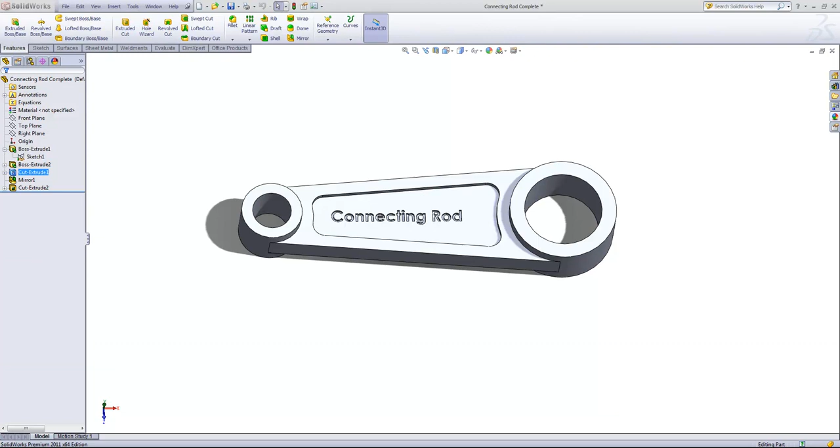In this video, we'll create multiple extrusions from the same sketch, and this allows you to create your entire profile. So the entire profile here that we see, except for the connecting rod sketch, is produced in a single sketch. If I take a look at that sketch, we can see we have different profiles, and we're going to use them for separate extrusions.

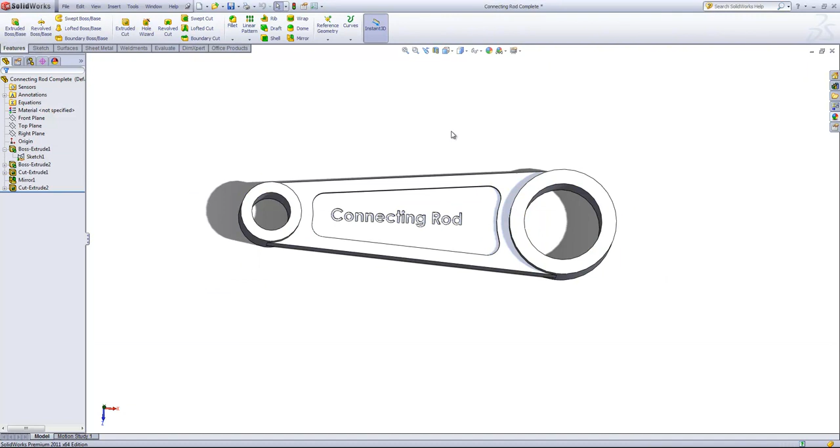So the first thing we'll do is create a new part, and then I'll go ahead and draw up a sketch on the top plane. We'll start by drawing in a center line horizontal to the origin.

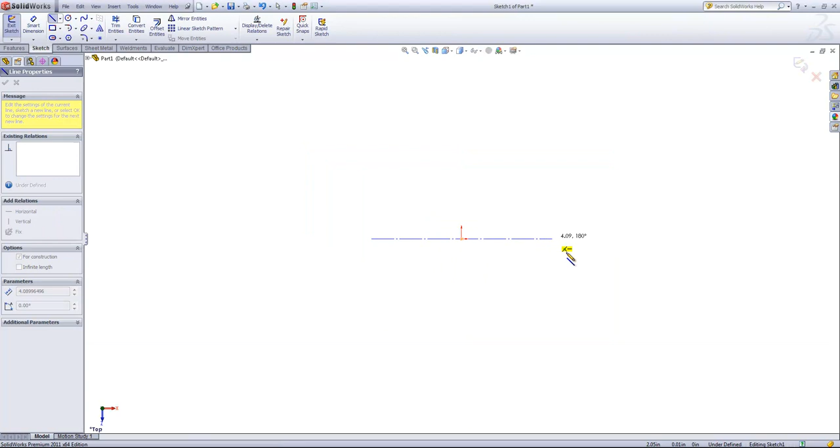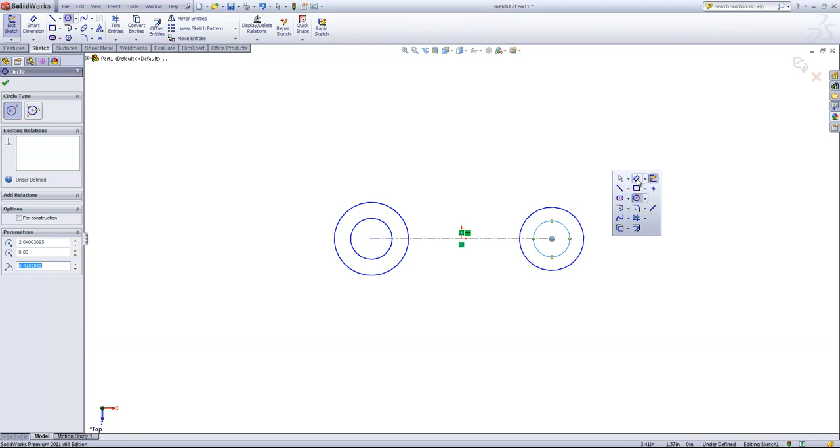Then I'm going to make the center line and the origin have a midpoint relation. And then I'm going to place several circles on both sides of the line, and then we'll go ahead and give this dimensions.

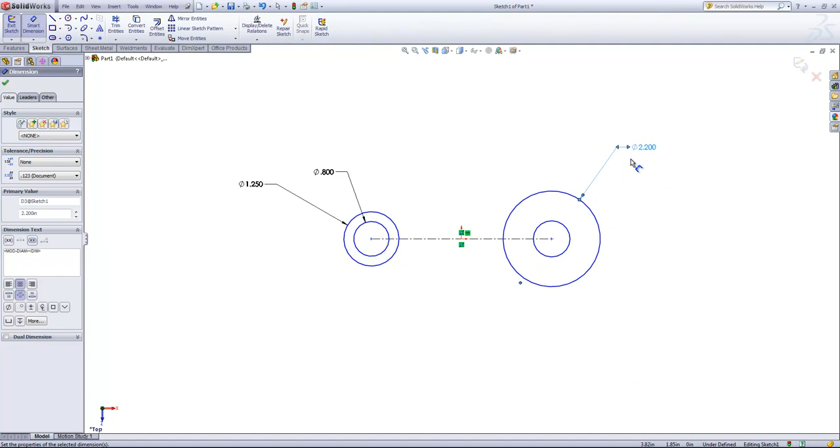So the first circle will be 1¼ and this inside circle will have a diameter of 0.8 inches. On the other side, this will have a diameter of 2.2 inches, and the inside circle will have a diameter of 1.6. From there, I'm going to give this center line a length of 6 inches.

Then we're going to draw in a line from one circle to the other, and we want these two to be tangent. Because they're a different size, the only point we don't want to click here is one of these quarter points, because that'll make it coincident to that quarter of the circle.

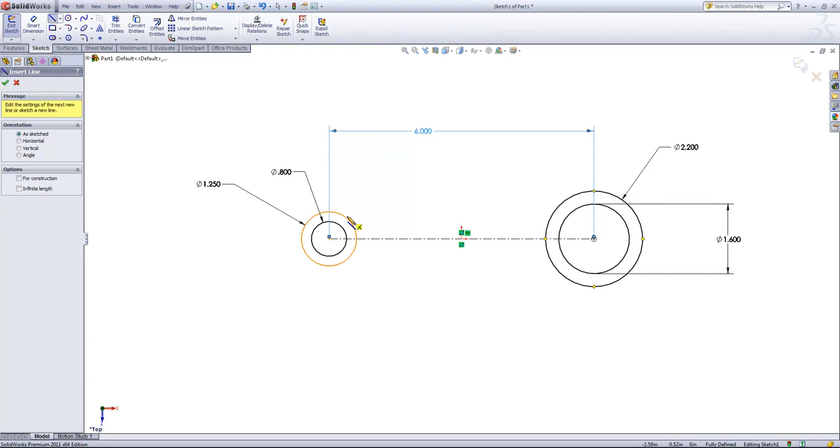So if I click anywhere else on the circle and draw out a line to the other circle here, I just want to make sure that tangent relation shows up on the right. I'll go ahead and control select the line and this circle and make these two tangent.

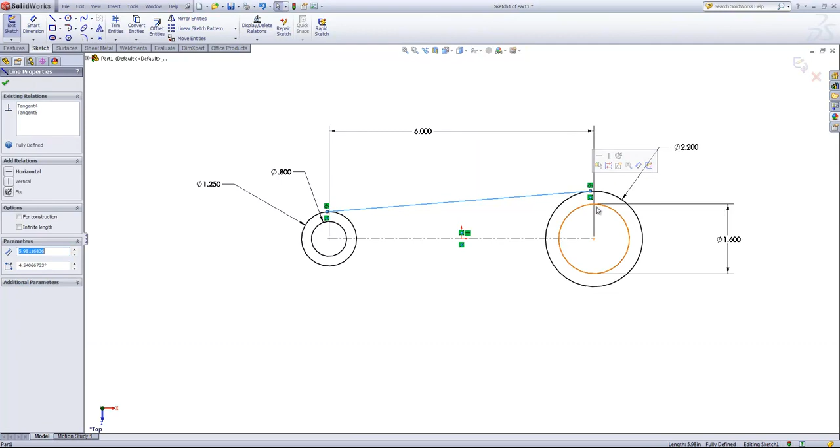And if you didn't have the tangent relation come in on the other side, you can do the same by control selecting the line here and the outside circle as well.

From here, we want to create the inside profile for the cutout that we're going to have, and we'll do that using the offset entities. I'm going to go ahead and set the dimension to 1/4 inch.

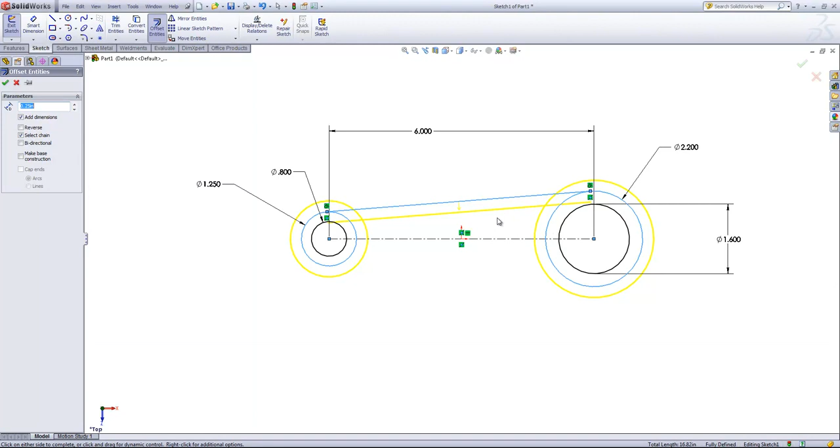Then I'll select out that line, the circle, and this circle here. This is on the correct side, so I'll go ahead and just click in the workspace and add that in. Now, normally with the offset entities, you can drag out points on a line.

So this side we're able to drag out here. And this side we're not able to drag out, so we're just going to use a trim to finish off this profile. So I'll go ahead and drag this point out and control select this circle, and I'm going to make that coincident.

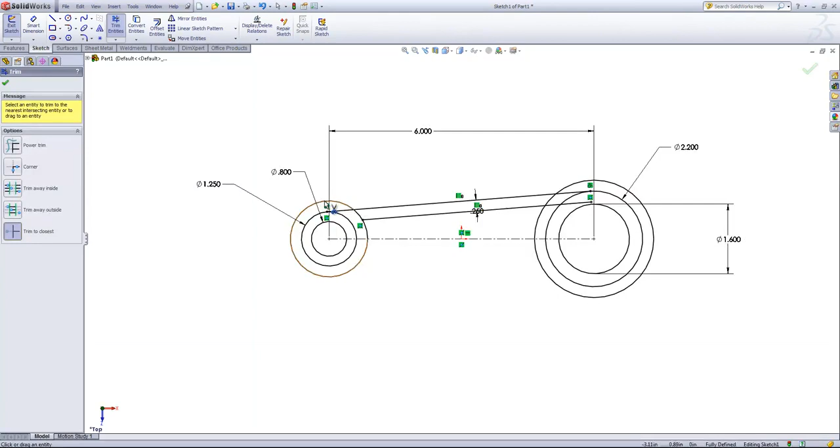And then we'll come into the trim entities and choose the trim to closest. I'll go ahead and select out all the entities that we want to remove, and once I have those selected, I'll go ahead and click OK.

And we're going to add in several fillets. So I'll choose the Sketch Fillet tool, set this to 1/4 inch, and select out these corners.

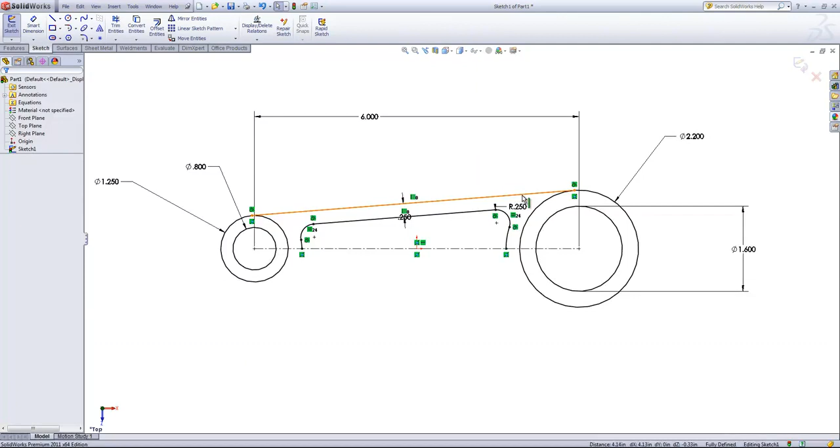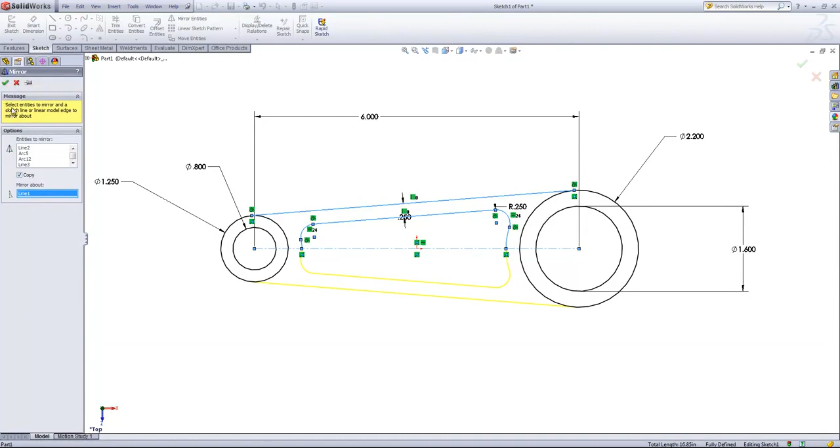And lastly, to finish up our sketch, I'm going to go ahead and mirror over the inside lines as well as this outside line to the other side. So we'll choose the mirror entities, choose out the top line, and each one of these inside lines. Then for the mirror about, we'll choose the center line, and we're just going to go ahead and leave that copy option checked and click OK.

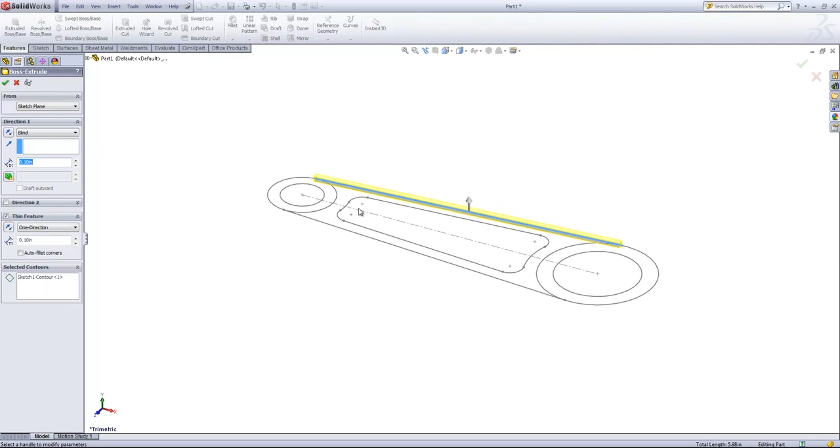From here I can go ahead and exit the sketch, and we can create our extrusion. Now when I choose the extrude tool and then I choose the sketch, SOLIDWORKS is automatically going to look for open profiles or closed profiles. In this case it sees multiple profiles to work with, so it automatically brings you into this selected contour box.

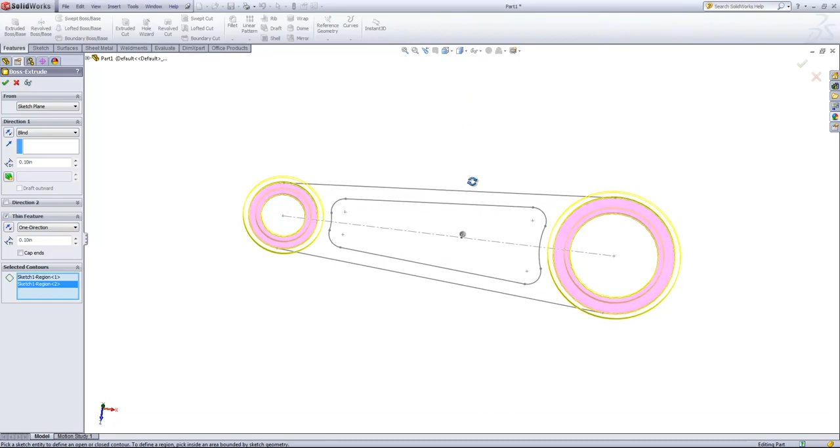If I delete out that line that I first selected, I can go ahead and choose out the two regions of those circles. And I can see it's using a thin feature, which we don't want in this case. So we can go ahead and remove that out.

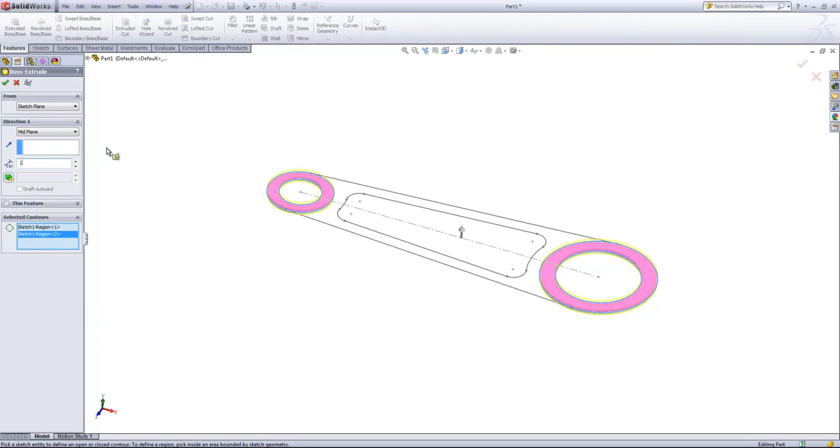Lastly, for this extrusion, I'm going to go ahead and set the end condition to mid-plane, and we're going to set this to a depth of 1 inch. And exit the extrusion.

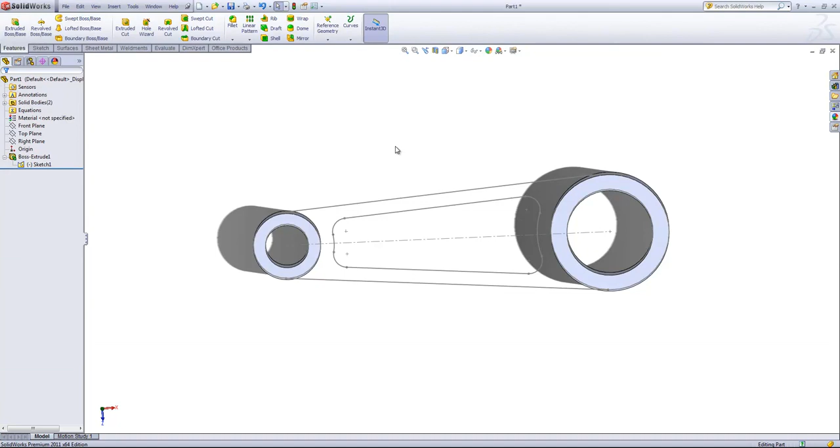Now we want to go ahead and reuse that sketch. We'll click on it and go to Show so we can see it. That selected contours option can also be accessed before we go into the extruded feature. And that can be done by right-clicking, coming down, and choosing the Contour Select tool.

So in this case, I'll just choose this outside line, and that'll allow me to select this region. Then we can go into Extruded Boss Base, and it'll automatically populate that region into the selected contours box. You'll also notice there's a feature scope. You can have this merge with all of the bodies or just with selected bodies. In this case, it's going to auto-select both cylinders there, so we don't have to change this.

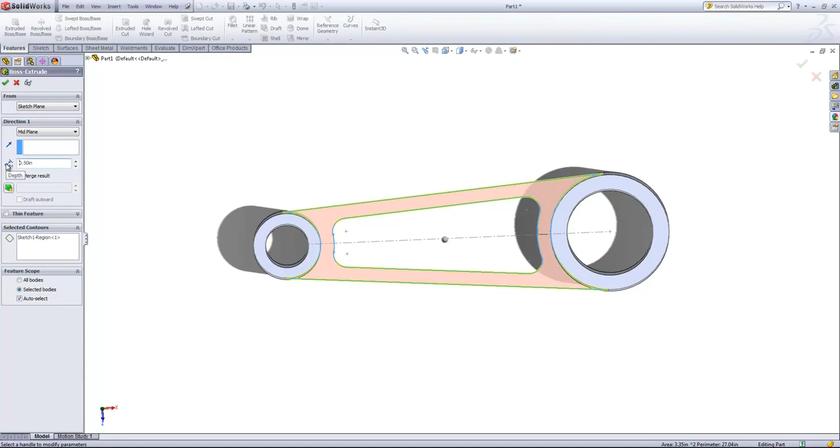We're once again going to use a mid-plane end condition and choose 1/2 inch as the depth. And then I'll go ahead and exit the extrusion.

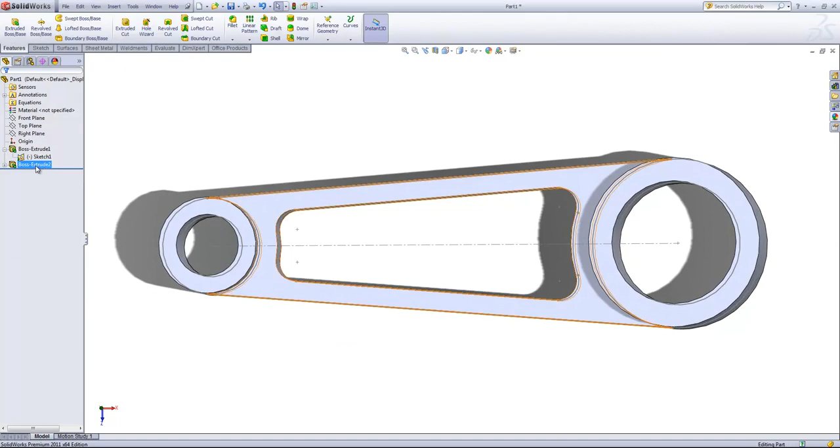From here, we had a pocket on each side with this profile, so we could do an extrusion from the inside. But I'm going to come back into Boss Extrude 2 and choose out this region as well.

Then we're going to use this profile to create a cut on the top. So once again, I'll right-click and come into the Contour Select tool and choose out that contour, then go into Extruded Cut.

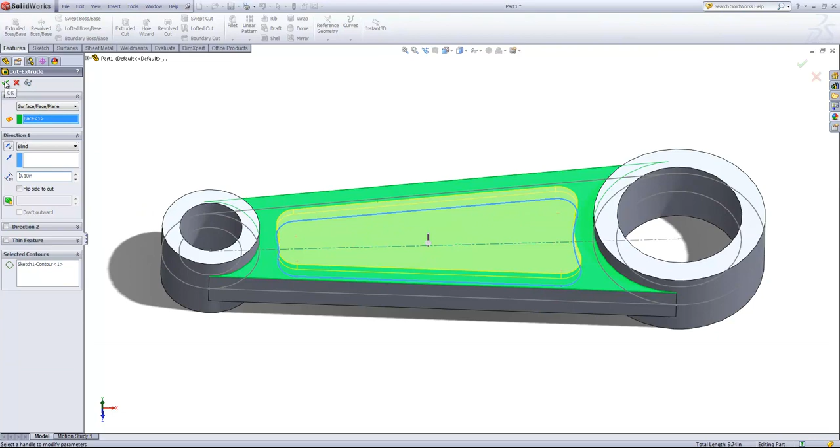Now we actually want to cut from the top surface, so we're going to change the From option in the Cut Extrude to From a Surface Face or Plane, and just choose that top face. For the depth, I'm going to choose 0.1 inches, and I'll click OK.

That creates our cutout on one side. Now I can go ahead and click on the sketch and hide it away. And we just want to mirror over this pocket to the other side.

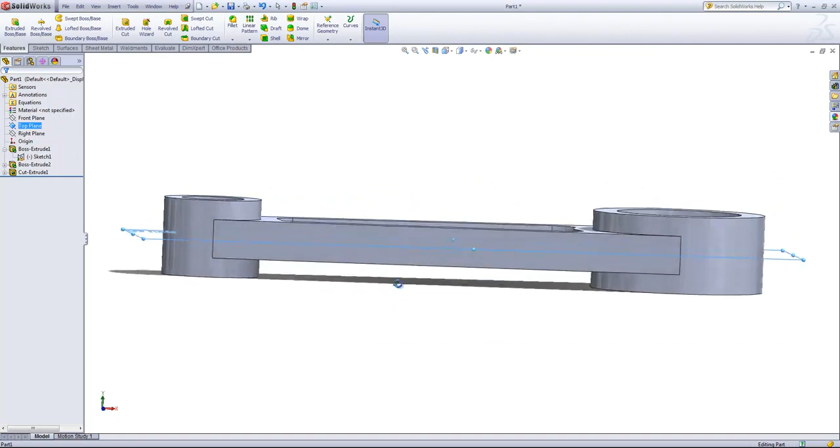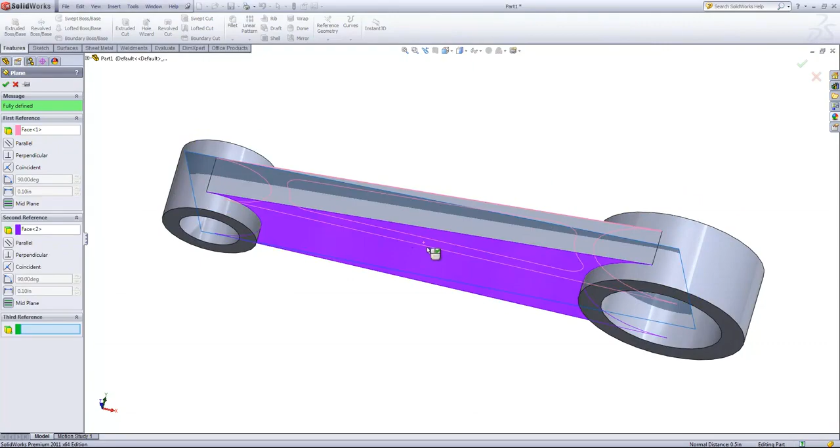Since we did a mid-plane extrusion, we could just use the top plane. But let's say we didn't model it this way and it's a little bit offset from any of our standard planes. We can come into reference geometries, choose the plane option, and select the two opposite faces. By default, that's going to choose the mid-plane option for the reference geometry, so we can click OK.

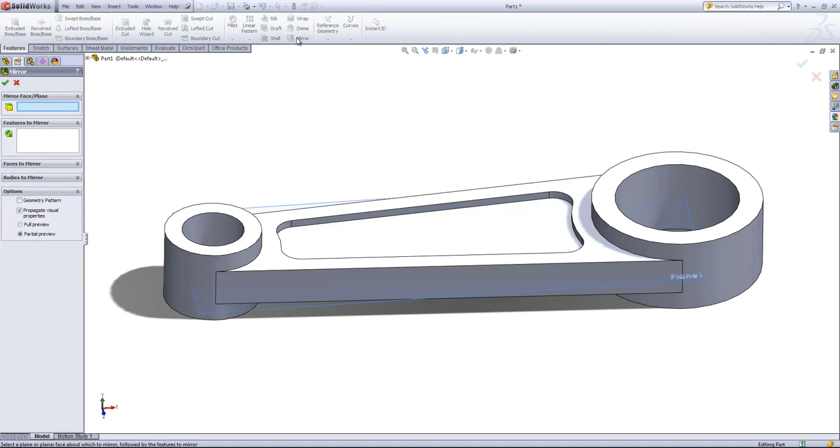And now we have our mirror plane. Next, I'll come into the mirror tool, choose our plane 1 as the mirror face, and I'll choose the cutout pocket as the feature to mirror.

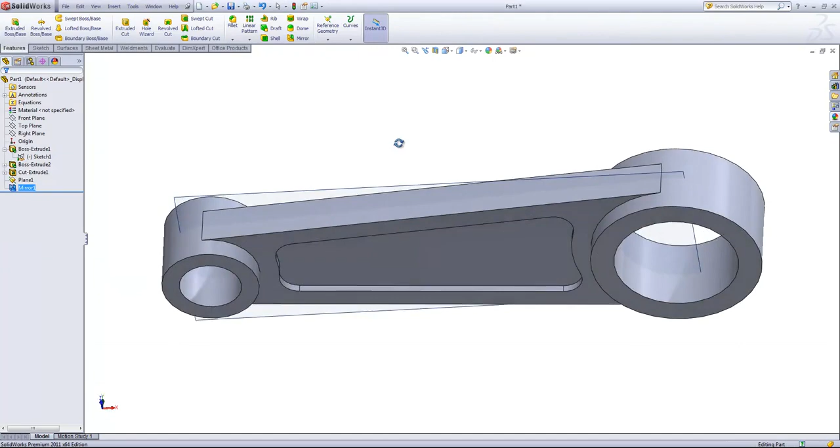If we choose the geometry pattern option, this would ignore any end conditions or starting conditions and just try to create the geometry on the other side. And that'll complete our mirror.

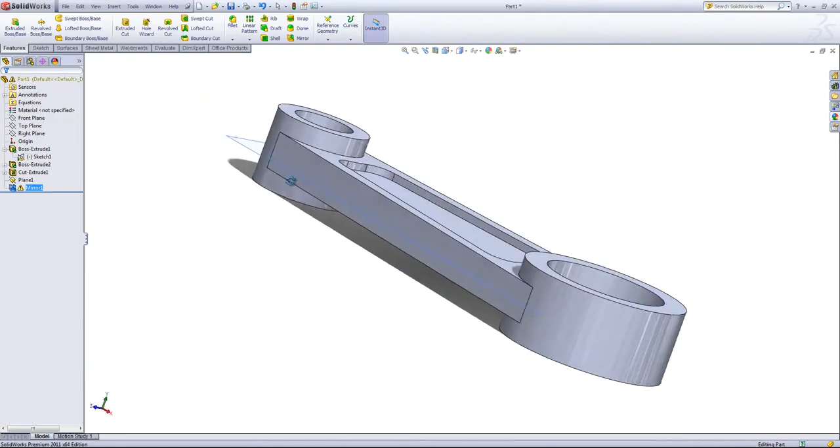If I go back in and edit the feature and uncheck that geometry pattern option, it's going to try not only to copy the cut extrude, but also copy any from or end conditions we used. So if I click OK, you'll see that mirror no longer completes.

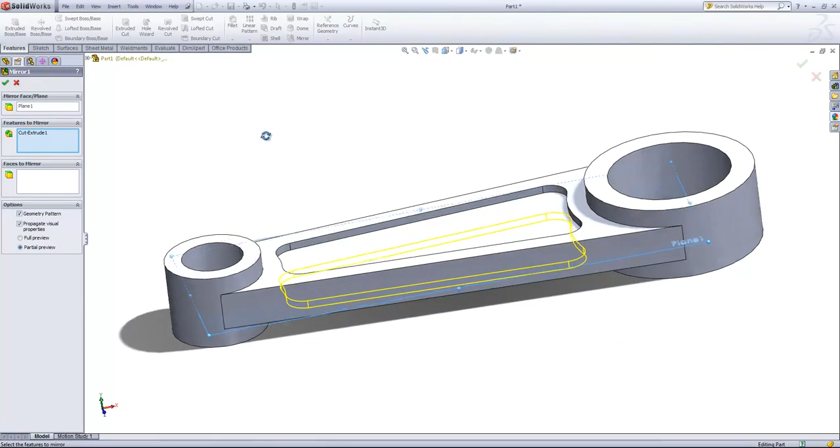You see that we have an error. The reason for this is that we used a From starting condition for the cutout, so it's looking for that same face to start the cut on the other side. It's not going to be able to do that, so we're going to have to use the geometry pattern option to complete the mirror.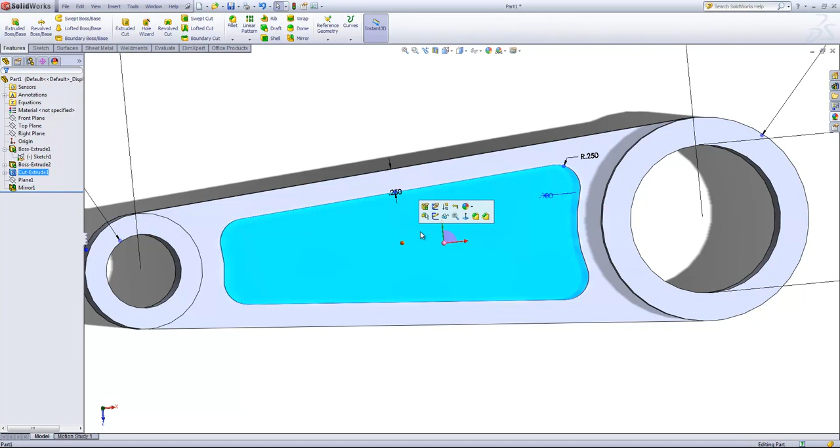I can go ahead and hide out that plane. And the last thing we'll do here is add in a cutout for some sketched text. So I'll go ahead and create a sketch on this cutout face.

Then we're going to draw in a center line, and I'm going to draw in two. First, I'm going to go normal to this sketch by doing the spacebar normal to, and I'm also going to draw a center line across from center to center there.

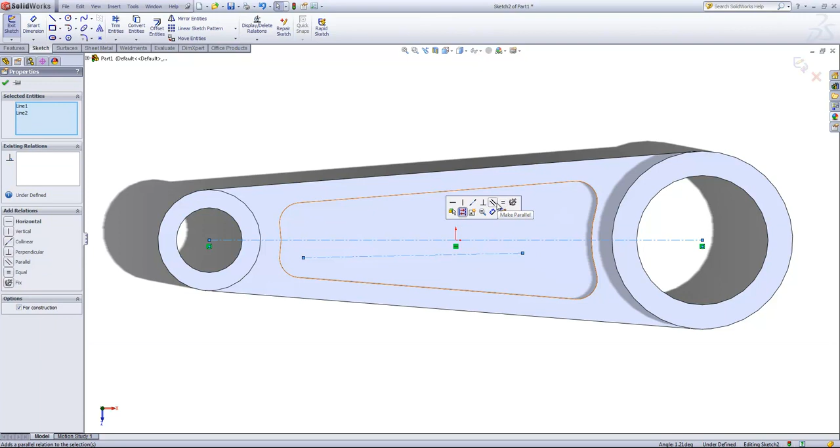Then I'm going to make this center line and this center line parallel. The reason I did that is the sketch text is going to sit on top of the line I choose, and if I did it here, our sketch text would be a little bit above center. So I'm going to dimension this off by 0.1 inches, and we should be able to get our sketch text roughly centered.

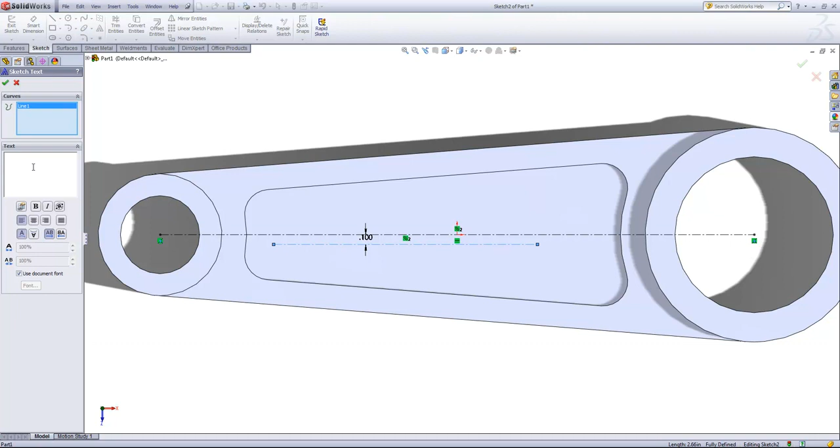So when I go into the sketch text option, the first selection is curves. It wants me to select either a curve or an edge to add the text on, and then I can type it into this box.

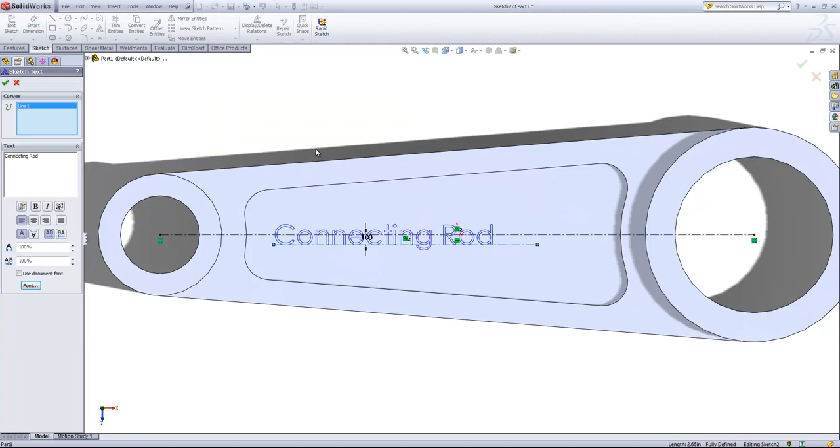I can also change the size of this. If I uncheck Use Document Font, I can increase this to, let's say, a height of 0.2 inches, and that'll get it centered along that line. You also have options of flipping the text as well as the direction, choosing how to orient it, and we could also change the spacing.

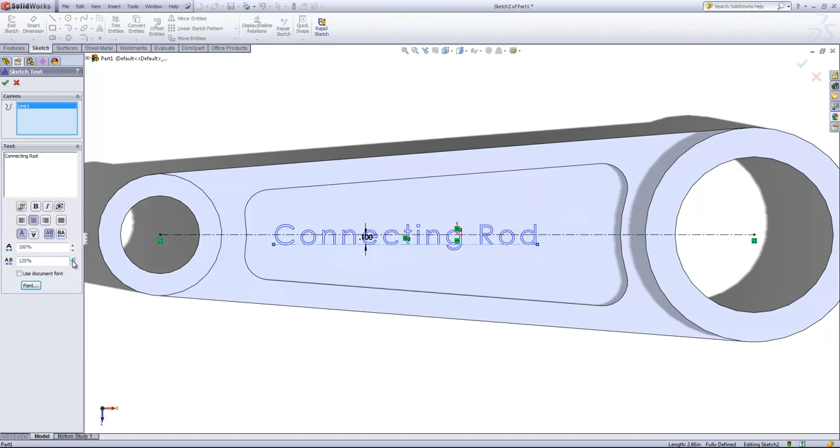And we can go ahead and exit. Depending on the options you choose, if you drag out these lines, it'll move the text there. And if you bring in the end of this center line past certain letters, it'll go ahead and remove those out or won't display them.

So we'll stretch this out a little bit to make it roughly centered and then exit the sketch.

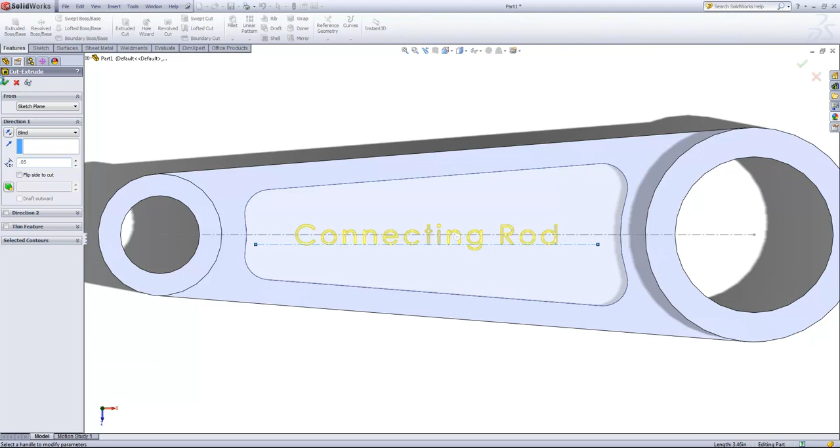Lastly, I'll come into the extruded cut and choose this sketch, and we'll choose to extrude this to a depth of 0.05 inches. And there we have our completed connecting rod.